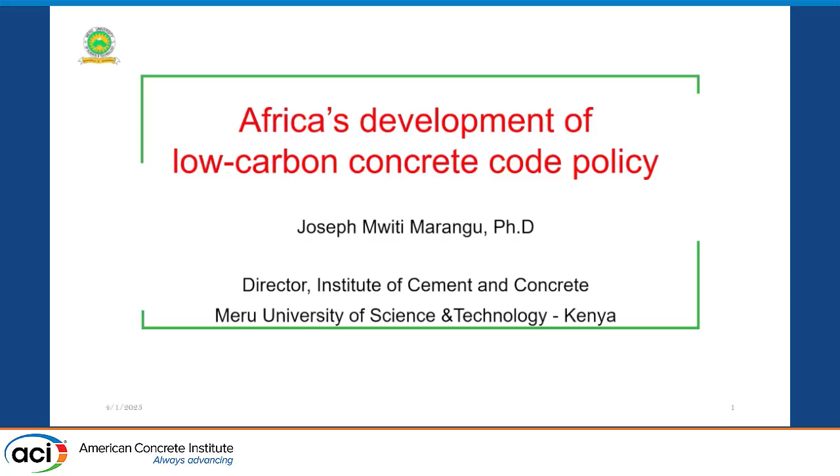Building up from what Professor Karen Scrivener has just presented, we expect a lot to be happening in Africa, a lot of action in terms of building and general construction. It's estimated that by 2050, the urban population is expected to be about 1.23 billion people. The UN Habitat expects that a lot of people will be living in urban areas. Currently, most people are predominantly living in rural areas, but it's expected that in the next 40 years, more than 50% will be living in cities. That means there will be a transition from rural areas to urban areas.

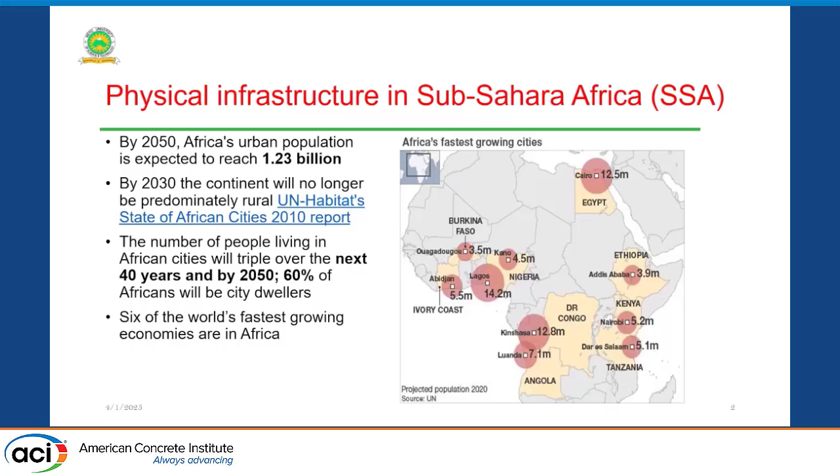Looking at this map, we see that most of the fastest growing cities and economies are in Africa. The most rapidly urbanizing cities, led by Lagos, Cairo, Addis Ababa and so forth, have populations rapidly increasing. This means that as population increases and urbanization rates also increase, there is a growing backlog of housing for these people.

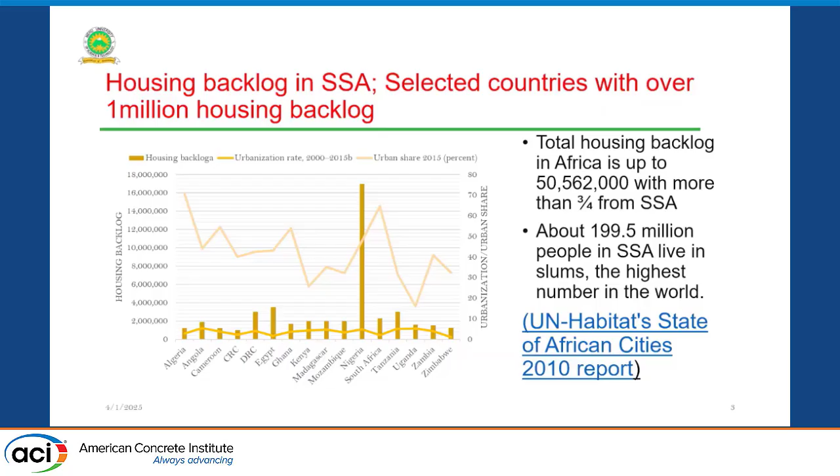This calls for some action in terms of building, in terms of the demand for housing for these people. The dreams and aspirations of these people are to live in an affordable and decent house. There's a lot of discussion going on

touching on the kind of dreams and aspirations for the people in Africa, and one of them is building with timber. But when you talk about building with timber, we find that the policies in this country actually ban cutting down of trees. When there's a shift to building with timber, this means it's going to erode the gains that have been made in increasing vegetation cover in these countries. That means there will be biodiversity loss, loss of tourism activity, and a lot of the nature found in sub-Saharan Africa will be destroyed because many trees will be cut down to be used for construction activities.

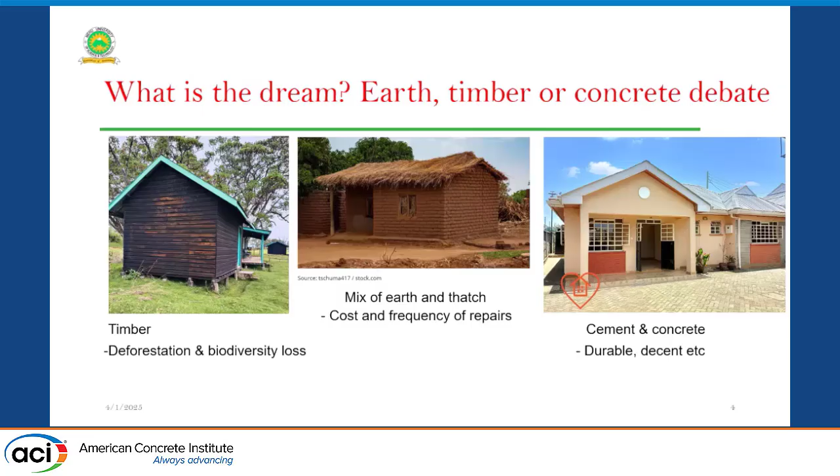What we find is that there is a lot of shift towards building with cement and concrete, as in the third application, for the simple reason that it's decent and durable. Because of this, there are a lot of initiatives going on to achieve that.

The next question we ask ourselves is, who is actually doing the construction? There are several categories of people or organizations who are involved in the construction industry in Africa.

Just to give you the landscape of how construction activity goes on in Africa: we have construction projects undertaken by the government, and most of these are anchored in what they call affordable housing projects. So we have government-initiated projects conducted by the government itself, doing the financing and the construction, involving the local people and so forth.

But this is a very small fraction of the houses. The other kind are the private developers, which represent the real estate companies involved in construction and so forth. We have also the local government and municipalities - cities and municipalities which provide some subsidized housing. They construct their houses, and thereafter avail these houses to the citizens.

We have also construction being done by non-governmental organizations, the NGOs, but this is mostly focusing on underprivileged communities, especially those who are vulnerable. But again this is a small fraction. There are community-based organizations like faith-based organizations doing some construction, but again this is a small fraction. International agencies and donors, the United Nations, but these are small initiatives.

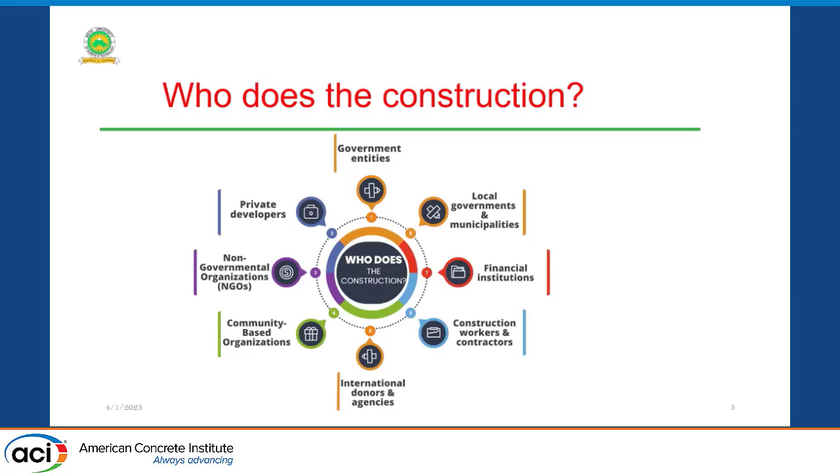So when you talk about building codes, much of this happens after an incident has occurred - maybe a building has collapsed, maybe there was fire, and so forth. What you need to note here is that a lot of code exists just to prescribe the construction requirements: how do you construct, where do you construct, and what kind of materials do you use.

A lot of these building codes also talk about issues to do with energy conservation, how the building should be accessed. More than 75% of the building codes we find in Africa talk about fire. For strange reasons, they really emphasize a lot of issues about fire.

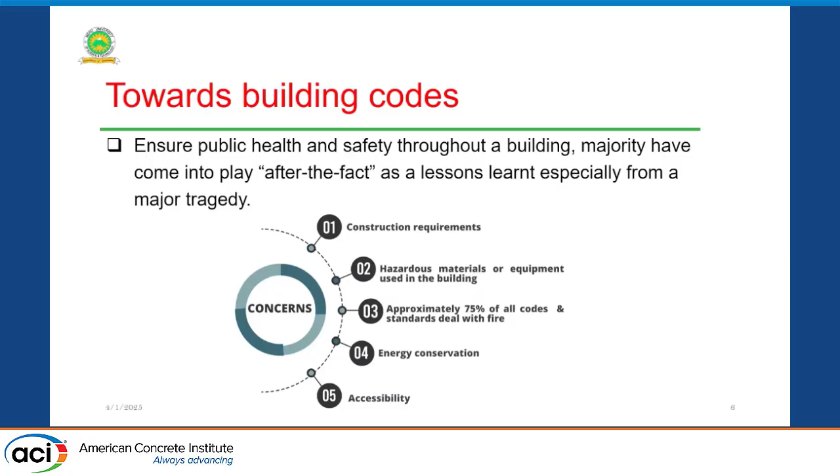What we also need to realize here is that a lot of building codes are imported, maybe from the global north, and this importation happened over the last 40 years. Much of it has not been revised to reflect the current climatic conditions or the realities in terms of local materials which are available. Most of them, reading these documents, look quite obsolete.

That means the document requires to be improved or revised a bit, and so forth.

A lot of the countries which have these building codes are now trying to adopt Eurocodes, and they're trying to build what we call the national annexes. The national annexes are what prescribes exactly what is happening.

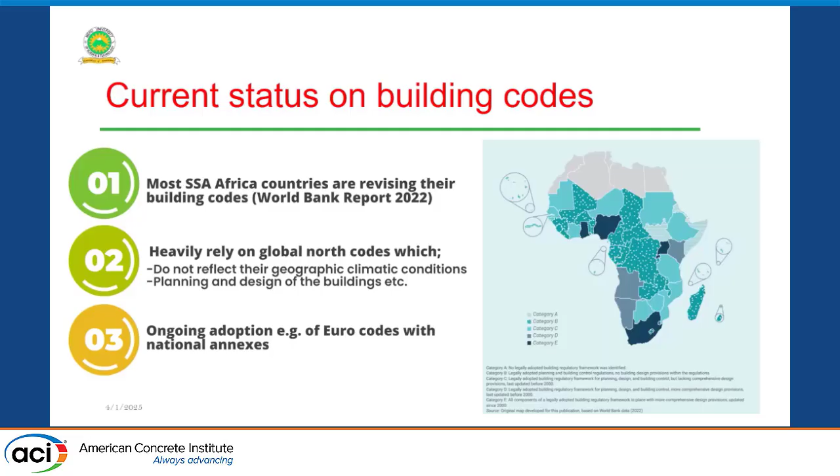I have found it a bit strange at times in some countries where even in the building code you find them talking about freeze and thaw. In countries like the Sahara Desert, there's freeze and thaw mentioned. You can imagine how interesting that document is to look at. I don't know where this happens in sub-Saharan Africa, but reading some of those documents, that's the reality.

So what are some of the steps towards low carbon cement? For us to achieve low carbon concrete, one of the key things is, of course, the low carbon cement. And in low carbon cement, we have to look at the existing cement standards, and the existing cement standards, again, do not reflect the realities we find in sub-Saharan Africa.

We find a lot of this cement talking about slag, fly ash, and so forth—industrial byproducts. Most countries in sub-Saharan Africa and in Africa are not industrialized, and therefore slag and fly ash are materials that are very minimal in quantity in these countries. We find that these standards exclude or do not have the local materials.

I would call them pozzolans, which could be exploited or used to produce low carbon cement, like calcined clays, as one of them. So there is a lot of discussion now going on about amending these standards to reflect the climatic conditions, the local raw materials, and the prices of those countries, because when these countries imported the standards from the global north, they came with the prices of the global north. They came with the materials found in the global north.

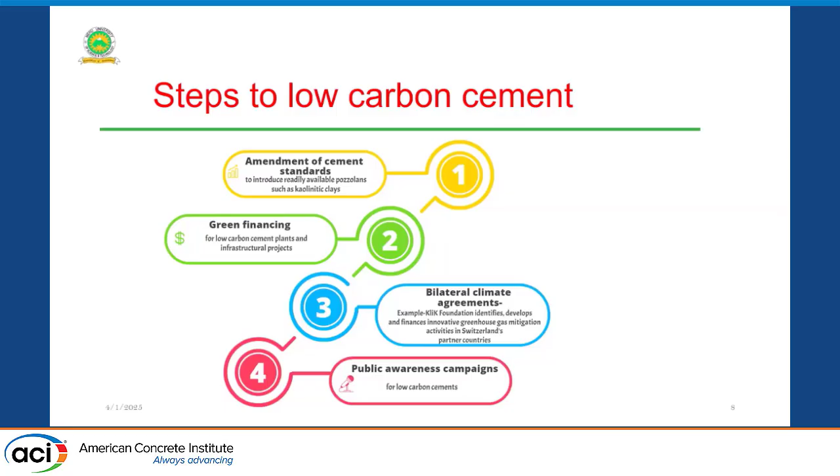Now there's also the issue of public awareness campaigns, where people are talking about coming up with roadmaps for decarbonization. In the roadmap for decarbonization is where the issue of standards really comes up, because even for cement companies to produce low carbon cement, there must be a standard to exist for them to be able to produce and sell their product. The companies cannot produce something they cannot sell. So there is a lot of public awareness going on and needed. Currently it's not at a very high level, but there's some discussion now going on along these lines.

We've got this project that we are working on with Professor Karen Scrivener and other partners, and we have a technical resource center for limestone calcined clay cement. In this technical resource center, what we are doing is trying to support the uptake of limestone calcined clay cement in sub-Saharan Africa.

Why sub-Saharan Africa? Again, because sub-Saharan Africa has a lot of countries with high population growth and high urbanization rates. This is why the future construction activity is taking place here in the next decades. For this particular reason, the Technical Resource Center supports the identification of clays. Where are these clays? Because someone would be asking, where are the clays so that we can produce them? Again, how do we produce LC3?

This Technical Resource Center supports technical advice and, with our geologists, lab testing for the uptake of limestone calcined clay.

Here are some images of this Technical Resource Center, which was inaugurated two years ago. You can see Professor Karen Scrivener opening the center, along with Professor Shashank Bishnoi. It was such a big event, so these are some photos from that occasion.

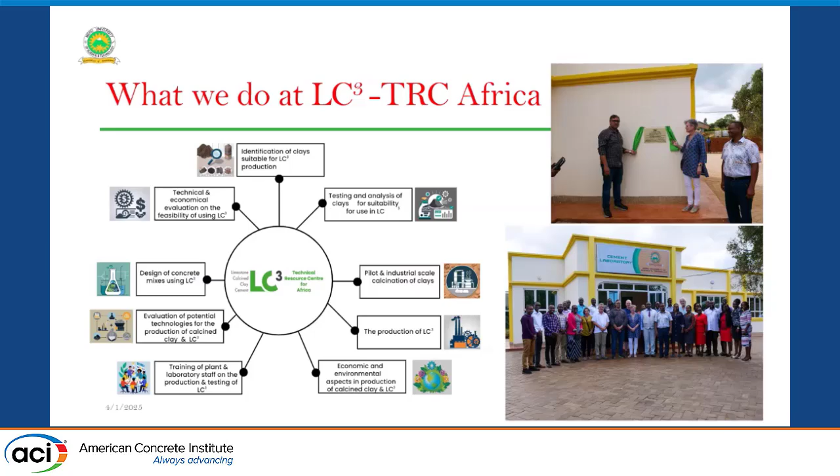So far we are doing work to develop a low LC3 standard in Rwanda, on a one-year project. Currently, standards in East Africa are mostly the European norm standards in operation. However, we look at the provisions within these standards.

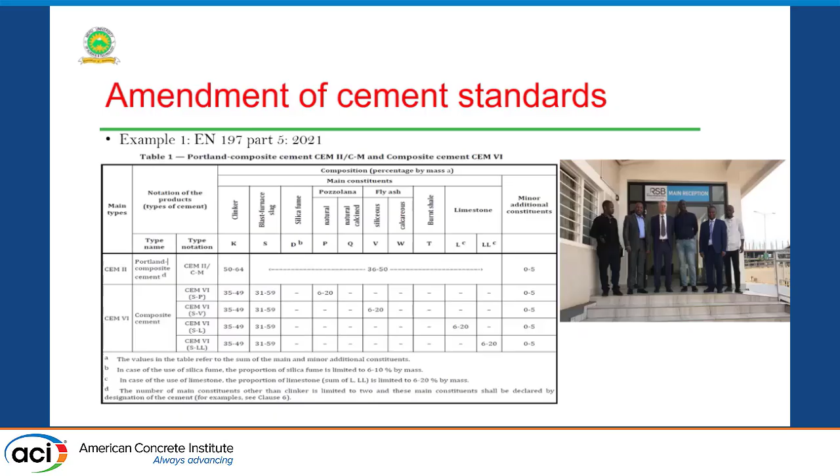We realize that for composite cement, EN 197 Part 5 allows clinker substitution up to 50%. With recent research that has been conducted, there is now potential to also allow clinker substitution of up to 35%. We've been working on and having this discussion.

Ghana has already adopted LC3 35, meaning limestone calcined clay cement with a clinker factor of 35%, which is quite good because it allows people to make low carbon concrete.

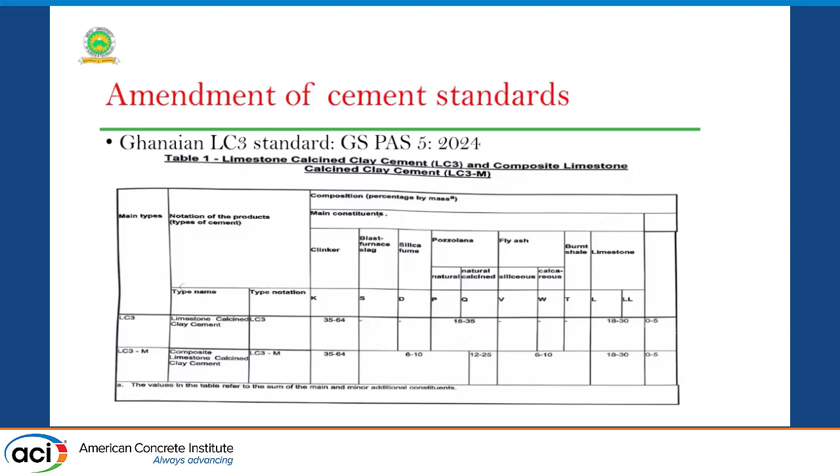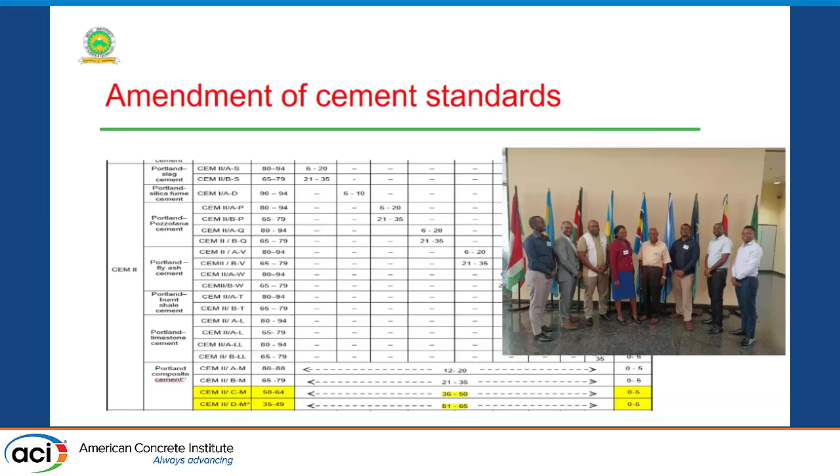At the East Africa level, as I mentioned, we are working in the 8 countries of the East Africa Community. Since they use a common standard, we are amending EAS 18 Part 1, where there's a clinker reduction of 50%, and now taking it to 35% replacement. This has already been accepted by the 8 member states, and now it is at the balloting stage.

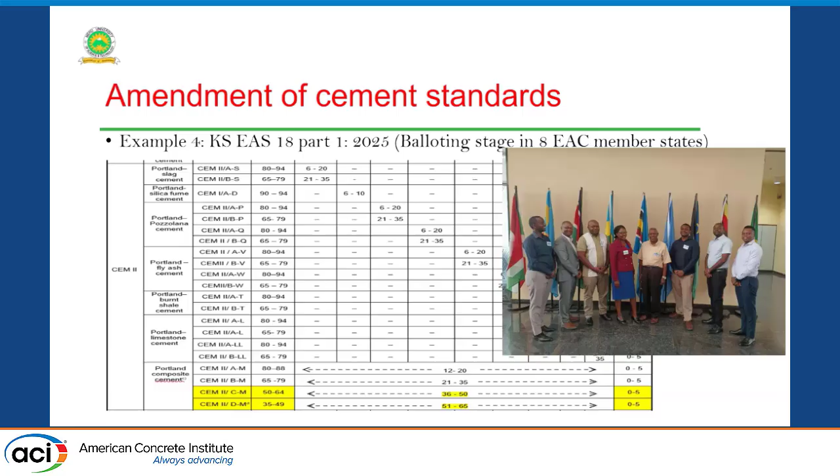This means it is quite advanced, because after the balloting the standard will be published. This is one of the small things we can do to make a big difference in achieving low carbon concrete, because once the standard is gazetted, cement companies can produce it, and consumers can use low carbon cement to make low carbon concrete. So in conclusion...

There's a lot we can do in terms of policy alignment for carbon reduction or low carbon concrete. One is expansion of sustainable investment and finance initiatives, where there needs to be a push or focus on investing in and financing low carbon initiatives, including standard development.

Tax policies that discourage carbon intensive choices are also needed. Currently, even if you use carbon intensive materials, there's no deterrent. But if there's a policy change in some of these countries, this can go a long way to promote low carbon concrete.

There are a number of other aspects or initiatives that can be undertaken. One is low carbon business models, which includes green procurement, so that purchase or importation of raw materials that do not allow low carbon materials is discouraged.